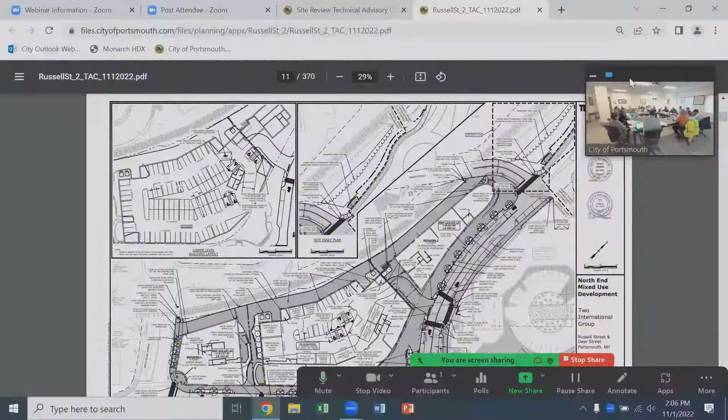First comment is staff is to review third-party stormwater and traffic reviews when available. We did get the TEC review letter last night and the CMA review letter earlier today. I do want to go through those a little bit, but I'll go through the staff comments first and then get back to those peer review responses.

Comment 2: speed bump should be a hump, please include detail. We can make that revision. Eric, I'm guessing this was yours. Do you have any specific dimensions of height, length you're looking for? No, but I think if you have access to ITE, they have design standards for that. Okay, yeah, just follow that. Got it.

Comment 3: TAC will need to review the redesign of the building relative to sewer easement prior to recommendation to planning board. That was the handout I passed out as Peter was reading the project in. The image on the left is the building footprint that has been on the plans for the last 3 or 4 meetings. The building on the right is the revision we're proposing to make, so we'd be increasing the radius of that upper left corner to the gray hatched area in order to pull the building out of the city's sewer easement.

So I know you're all just seeing this for the first time, this little corner here. Correct. Okay, so I don't know if there's any initial thoughts on that, or if you need more time to marinate, but that's what we're proposing to do, to pull that building out of the city's easement.

So is it just the first floor there that's changed, or is it? So it'd be, that portion of the building is 3 stories, so it'd be all 3 stories.

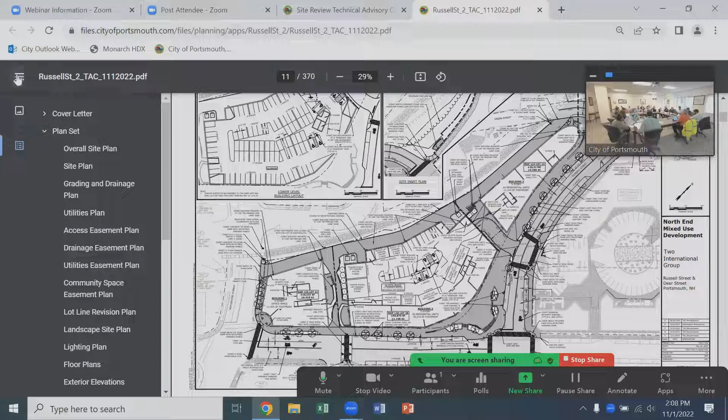You said there's an easement there? It's the city's sewer easement. Is the sewer under the building or close to it? And the easement, is it really wide? I think it's 10 feet or 15 feet off the center line of the sewer, I don't know the exact dimension. That upper left corner of the lot is pretty much all in the sewer easement.

Comment 4: the farthest east parking space on Deer Street next to the fire hydrant should be eliminated. That's fine, we can eliminate that space.

Comment 5 is related to that sewer easement: the sewer main located next to the foundation of proposed building 1 will need to be moved by the developer. So, as I just mentioned, we are proposing to move the building out of that easement. I don't know if the intention of the city is that the sewer needs to get moved regardless of the location of the building.

See Dave nodding yes. That is the direction we have been given. What's the direction? That the city still wants that sewer moved, even though we are proposing to pull the building out of the sewer easement.

So if you're moving it within the easement area, or what's the city asking you to do? To move it into Maplewood, off the property. So then you wouldn't need to clip the building? They want to go from there to there, under the railroad, and abandon this piece. Yeah.

So if you did that, you wouldn't need to clip the building? Correct, just trying to keep up. The intention of clipping the building was to avoid having to move the sewer, but it sounds like the city is telling us that we need to move the sewer regardless of what we do with the building.

Comment 6: Trees and Greenery Committee will need to approve tree grates, planting details, and planting species. We acknowledge that. Parking and Traffic Safety Committee, then City Council, will need to approve on-street parking changes. We acknowledge that as well.

Confirm overlay of Deer and Russell Streets as part of work. I'm assuming this is referring to repaving, Dave? Yes? Okay, so we have shown that on these plans and are planning on doing that as part of this. Okay, we agree with that.

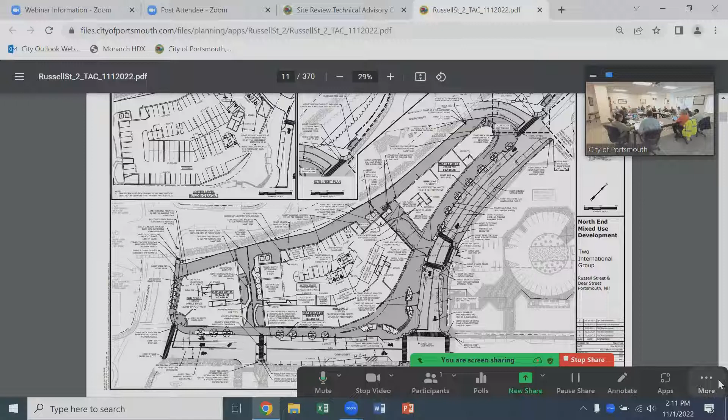Comment 9: upon further review and consideration, a raised crosswalk is not the preferred solution for Deer Street at Portwalk Place, as it is an arterial roadway with considerable truck traffic and a high number of left turns onto Portwalk Place. A high visibility at-grade crosswalk with RRFBs is the preferred alternate. So we're fine making that revision. I just wanted to clarify anything specific we need to do for the high visibility piece of that statement. That's the piano-style keys, the crosswalk markings, referred to as high visibility. Oh okay, yeah, gotcha. Okay, we are fine making that revision.

At all crosswalks, streetlights on either side of the crosswalk must be 10 feet from the nearest edge of the crosswalk with the luminaire centered over the travel lane of the street. The RRFB push button must be no more than 5 feet from the edge of the crosswalk and no more than 10 inches from the level landing. These are state DOT standards. We're fine making those revisions.

I think we're going to need to shift a couple of them to meet that, but we're fine making those, and we'll make sure we get all those final locations coordinated with DPW. Sharrow marking should be provided every 100 feet. We're fine with that, we can make that revision.

Per MUTCD, a one-way sign is required with the do not enter sign at the rear shared roadway at its intersection with Green Street. We will add that to the plan. And the left through pavement arrow on Deer Street at Russell Street is not needed, and we can remove that from the plans as well.

So I'm going to go into the peer review comments that we received yesterday and today, just kind of go through those as well. There's a few remaining on the TEC for traffic.

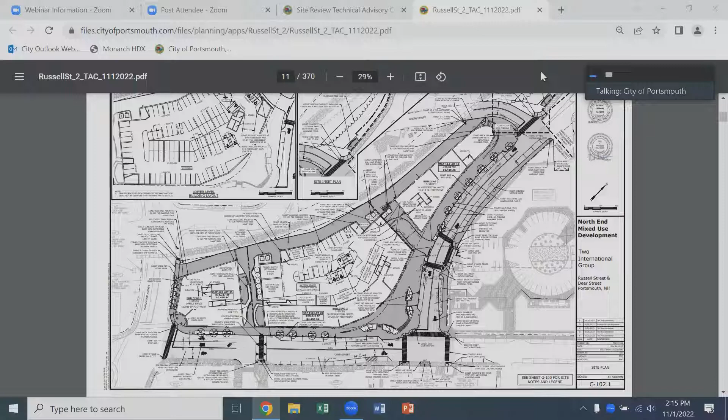For the stormwater review, which we received earlier today, there's one outstanding issue, and they've just asked us to provide some supporting documentation on the elevation of the on-site ledge. We do have boring data and a ledge profile plan that we can provide to CMA to show those elevations.

Additionally, given the size of the buildings on the site and the area we have remaining, we are not in favor of infiltrating that close to a foundation, ledge depth aside. So we'll provide all the backup information we have to CMA, and hopefully be able to close out this one final comment from them.

So that was all I had. If we have anything additional.

Neil, can we go back to the sewer? Is there a reason, if we pull that out of the easement, is there something about our project that's requiring that to be brought into Maplewood? Are we increasing the size of that line or anything?

The main impetus of the comment is that this sewer line is very, very important to the city. It drains multiple neighborhoods. The issue is that if we needed to work on that or something happened to that line, we would be completely blocking your driveway for extended periods of time, possibly. We really don't want that to be a situation we have to deal with. That's the issue.

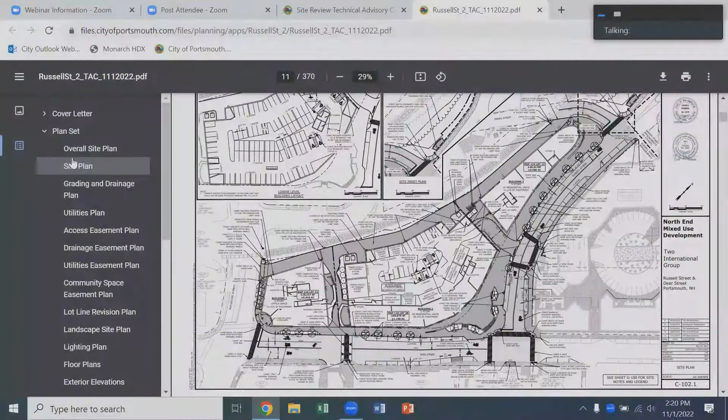Yeah, we can just add - it's hard to see what's going on because I can't see where that sewer is on this plan. We can just add a construction access easement to one of our easement plans for the entire parcel. Because there's already going to be a community space easement there, we can just add a temporary construction access easement on top of that.

Eric, we're not asking for video detection on this because they have a note on the plan saying they will do it. And how much - is it on that G100 too? No, it's a note on the site plan, general note 15 on G100. General note: Contractor shall install intersection video detection for Maplewood Avenue and Deer Street intersection. Coordinate with the City of Portsmouth Traffic Department.

Any other comments before we open up for public comment? All right, seeing none. Anyone from the public here like to speak to this? No one on Zoom. So we'll close the public comment portion and open up for further discussion.

Drainage been reviewed? Yes. Is there anything else outstanding we're waiting on? So there's several revisions, it seems like, that are in order. I think we could go through those and see how you feel once we get through that list.

The sewer main needs to be located next to the foundation of Building 1. That is a revision, and there might be an additional building footprint revision associated with that, or is that not certain yet? If we have to move the sewer, we'd leave the building as it is. Okay, so there's a revision there, for sure, for the sewer.

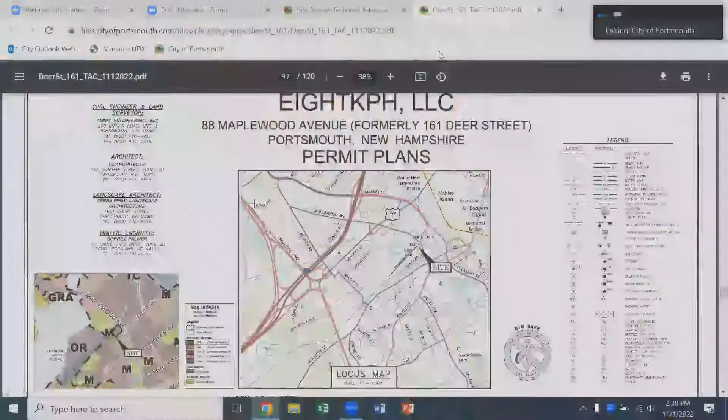Comment 2: please add more trees to the northern corner of the property where the driveway previously was. Also in the submission on page 4 is a landscape plan markup. The number of street trees proposed is in keeping with the ordinance requirements. When you get to that northeast corner of the property, it's an area with a significant amount of electrical infrastructure on the applicant's property. He's expanding an easement and providing more space for electrical equipment on his own property, so we need to work with Eversource to make sure they're comfortable with access to that equipment. We understand that's not the most beautiful thing that presents itself to the street.

However, Mr. Parker has shown a metal screen fence that will shield those transformers with a historical theme he wants to put on there. So we've shown on this additional landscape exhibit an additional street tree. Possibly we'll work with Eversource and try to locate that in an appropriate point in that vicinity, if that's okay to Technical Advisory Committee. There's also a need to get to the grease trap, there's a bike rack, so there'll be a wayfinding sign there too. We're trying to work those things all together.

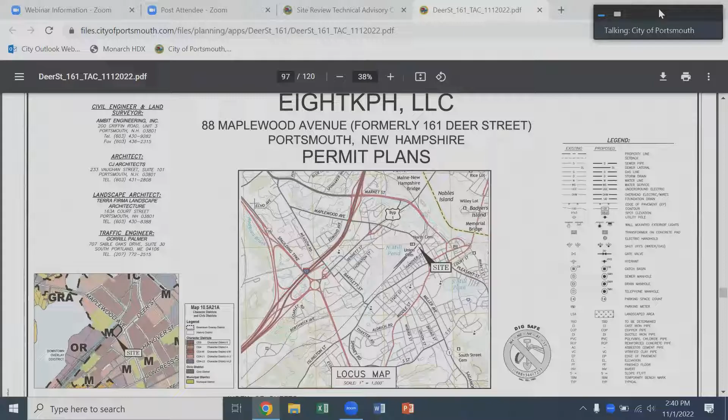The next comment: please provide a letter addressing the requested changes from TAC and any other changes made to the updated plan set in the next submission. Yes, we did submit the TAC response letter of September 6th, and that covered a lot of the issues on the revised plans. But we should have submitted another letter, and I can tell you the major changes not mentioned in the September 6th letter that came from meeting with you two months ago were the driveway location.

The driveway was proposed to exit onto Maplewood. It was not deemed the most appropriate location, so the driveway is moved to access the west side of the building at the existing curb cut off Deer Street. There were questions about the park design, and Mr. Parker did extensive redesigning and upgrading of that design. There were questions about the community space, and we talked about connecting it to Deer Street on the west side, which we did, and updated the community space calculations. There were discussions about that community space dead-ending and not providing ADA access on both ends, so we updated it to provide that, and updated some plan details in accordance with requests from DPW.

The next comment is that the existing water and sewer needs to be terminated at the main - this should be shown on the demo plan. As Mr. Desfosses instructed, I reached out to Mark Batchelder, the consultant on the Deer Street reconstruction project, and he explained that the existing water services to 161 Deer Street were set up on a 4-inch pipe that terminated in a gate valve outside of the right-of-way. The intent is that those existing services can be removed up to that gate valve, which is not in the right-of-way, so there'll be no cutting of Deer Street, and the plans have been revised to note that.

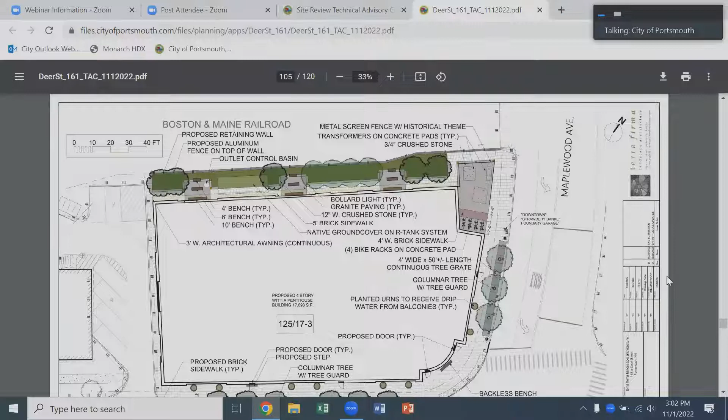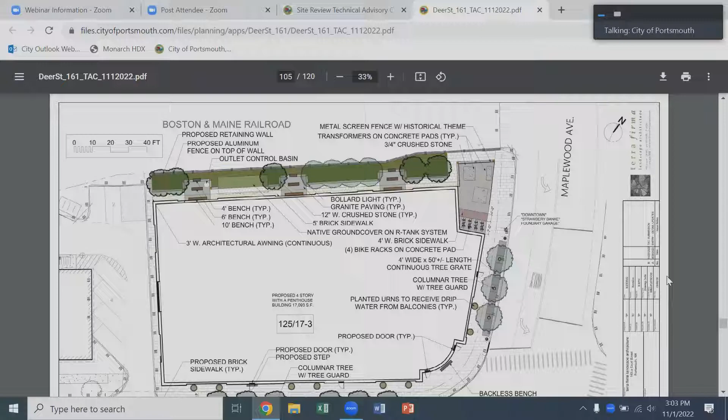At least you're being consistent. Yeah, exactly. Anyway, check out the park.

So if we did what you say, we'd lose green space. Well, you might lose a little. Maybe, and I'm not even sure. Angle that corner? Just kind of bring it in. All right, we could do that. You know, doing this, check out that park, it's a work - that's why it's a little more inviting.

Hopefully you didn't come here thinking this was perfect, so we're just giving you ideas. No, and I know you put a lot of time into it, Terrence, and I think you do great work. So just round them off, the corner there. They might even be bad ideas, but at least they're ideas. Exactly, we're trying. Rounding a corner is always a good idea.

Yeah, that's a good answer. Also round the corner on the fence. On the fence? Yeah, on the fence, make it more - just small fillets, like even a 3-foot radius. Yeah, fine, yeah, we could do that. We could do all of those rounded edges.

No, you mean on the edge of the walk, the brick back here? It's the edge of the walkway to facilitate drainage, so when plants grow up, they don't block the water from flowing off the sidewalk. So it's flush, but you're saying it's gravel - it's a crushed stone edge. Okay, so it facilitates drainage, so the plants don't block drainage coming off the walkway because it pitches away from the building.

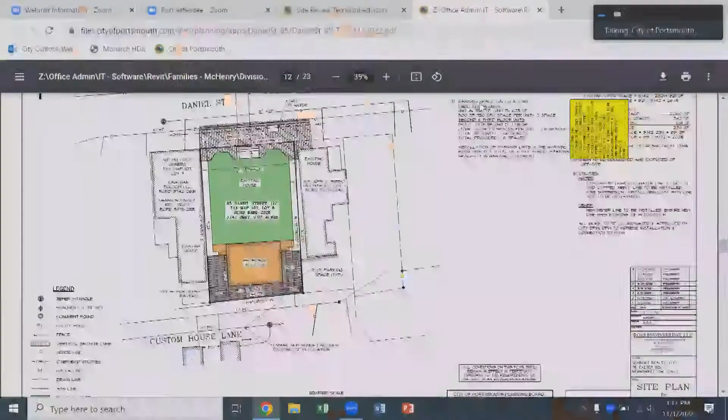I think the significant issues or changes from last time we were here would be found on the site plans. What we've proposed to do is install parking lifts in the covered garage, so we now have, as proposed, a total of 6 off-street parking spaces. The other significant item is that we've worked with the basement egress stairway and believe it's now compliant and shouldn't cause a life safety change. Other than that, the changes that were requested were relatively minor, and I think we addressed them in the submission. I believe yesterday we received some feedback, and what we're circulating now is some detail on the proposed lift system that we would like to install.

So other than that, I'd turn it over to Mark to go over some of the technical details. As Chris was just mentioning, this is really a basis of design and conceptual, just to show you that the lift does work in the space provided. We have a fairly high floor-to-floor, grade to second floor here, about 11.5 feet clear, in order to provide space for stacked cars. As we've shown in the other floor plans and site plan, the intent is that there are 2 garages, each would have a lift in it, and those 2 parking spots would be associated with the 2-story units, the larger 2-bedroom units on the second and third floors. The cut sheets on the second and third pages show you more specifics of the lift and the spaces required. We've highlighted on the third page the overall width and length of what's required for the lift and what we have available, currently shown in the garage plans, and what we have available exceeds what's needed by this particular manufacturer.

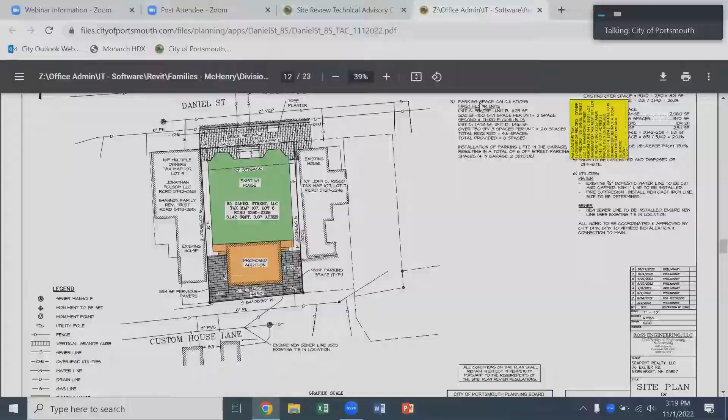All right, thanks. Any questions from TAC members? Why does the garage step down at the end of the ceiling? It really just allows space for drainage for the deck above. So if it actually steps down or not, you might not need to do it.

Is there a sensor on the ceiling to prevent a taller vehicle from going in? I haven't looked that far into the controls of the system, but there's got to be something, since people aren't always driving a Mini.

It's hydraulic, right? Correct.

How do people get into the garage? Is it through the garage door, or the side door, or internal? It's either through the garage door or through the man door from the center hallway of the building, shown on A1.

There's a door leading into each garage bay on the center corridor. Yeah, okay.

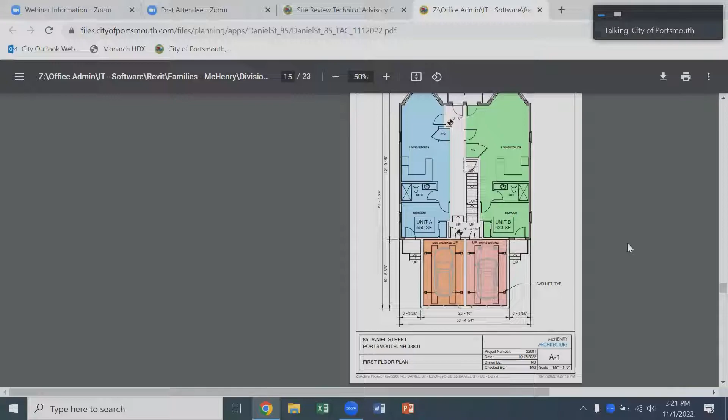20 inches on either side of this lift machine? Off the top of my head, I mean the way these are, yeah there's at least 2 feet, but there's 4 posts that control or hold the lift, and space on either side of the ramp that actually holds the tires in the vehicle.

How are you opening the door to your car? Well, that's the lift itself. But you only have 20 inches off the door to the house.

Right, so it looks like if you get 141-inch width of the garage and the unit is 100 inches wide from base to base, you've got 20 inches to either side to get out of your vehicle and then walk into the door going to the house.

They gotta go over that, go around the stanchion and over the arm to get in the house, if the lift is down. Yeah, it'd be 20 inches between the hydraulic post and the wall. Exactly right, so it's just that one pinch point, on all 4 posts. That's it.

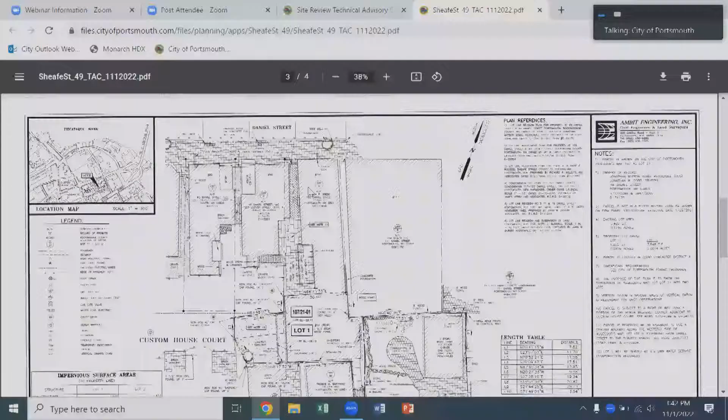Please identify the mechanism for creating easements for lots under common ownership. Included in the submission are the proposed conveyance deeds — they include 'together with' and 'subject to' as appropriate for Lot 1 and Lot 2. Lot 1 will be granting a building maintenance, access, and utility easement to Lot 2, and Lot 2 will be granting a building maintenance and no-build easement to Lot 1. Those are shown on the easement plan.

Please clarify which statements in Note 8 go to each easement on the easement plan. That was prior to the one just submitted, so I created Notes 10 and 11, which specifically say, for example, Note 11: building maintenance easement over Assessor's Map 107, Lot 2100, to benefit Assessor's Map 107, Lot 2101. The notation for the note is in the upper right corner under that 77 square foot easement designation, 'See Note 11.' So I've broken those out to be specific.

Applicant must show new water servicing Lot 1 on the plan for the city to approve the location; existing line servicing Lot 1 to be abandoned. So we submit the water service plan tying into the main in Sheafe Street, running up that narrow corridor.

We added Note 12 to the subdivision plan, calling for Lot 1 to have a new water service, and we added that the existing Lot 1 water service shall be abandoned. Hopefully that addresses the concerns, and we can move forward to the planning board. Do you want to add anything? We're ready to address your comments. All right, thank you.

I haven't seen it, that's what I'm saying. There's a man door at the end of the easement. Where's the door in the back, Jonathan? Is it at the end of the easement across from the Karen White construction property? Is it operable?

Can you hear me? Yes. The door that is at the end of the easement from Daniel Street, across the Weeds property, is a 36-inch door and is operable. I would like to point out that that area is actually used by Colby's Restaurant for an outdoor eating area and a storage area.

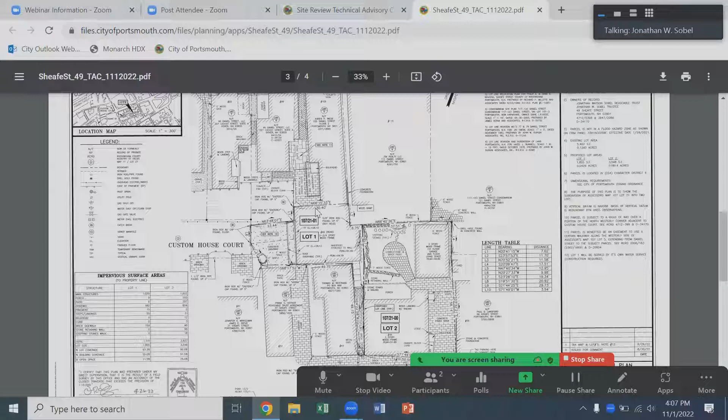In the case that we would continue with the designated Sheafe Street 911 access, we have an easement and dedicated ownership to keep that pathway clear. So I would not foresee turning to Daniel Street as a 911 address, because that really is quite cluttered—historically it's been quite cluttered. But in the case of Sheafe Street, it would be a dedicated fee simple ownership in which that access point would be kept clear at all times.

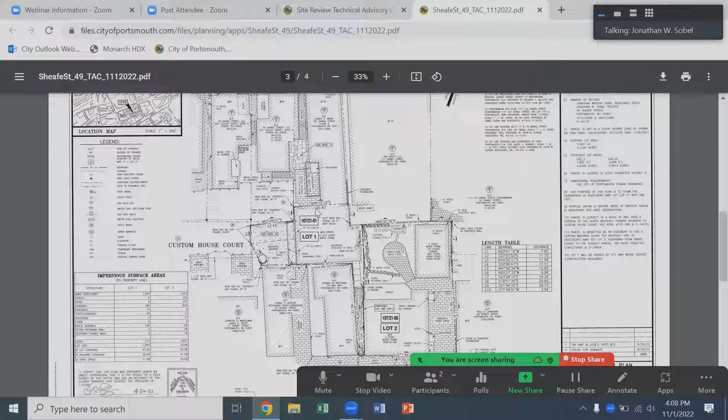So I just want to ask Pat one question. I did see that a lot of them are addressed off Daniel Street—is that something you would prefer, given that? Is that the other option you'd prefer, to be addressed off Daniel Street? No, it would be Custom House or Sheafe, not Daniel Street.

You'd like to see a site visit prior to this? I think a site visit would be best. It is my opinion that the determination from 10 years ago was the best possible solution for this location and this constellation of buildings, and my personal preference would be to stick with what they decided 10 years ago. Thank you.

So our deputy fire chief has asked for a site visit on this one to get a better understanding of the configuration of this area, and that's probably a good recommendation. Also, I think we need a little time to confer with staff about how we might explain that to the planning board as a condition, because we've typically wanted to see it as a condition of approval for the planning board that they get addresses and map block numbers.

Well, I understand that. I think there's a new consideration now that there's a subdivision, so I think I would need to explain to them, because we have really required addresses be squared away before, or at least before the building permit. So I think it'd be okay—I don't think it's a problem. It gives us a chance to kind of talk about that as staff as well.

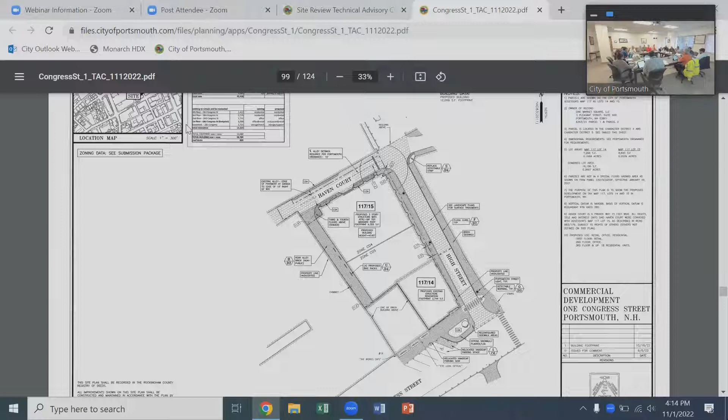The first one is that you would like us to identify all temporary licenses that will be needed for construction in the city right-of-way. Just to briefly answer that, we would expect that this project would require a CMMP plan. Mr. McNabb is prepared to talk about the plans for that, if you so desire to talk about that now - we'll leave that up to you as to whether you want that level of discussion at this point.

Before anybody else jumps in, I'd prefer we have an offline discussion with members of Public Works, talking about off-site improvements - is that what you were just talking about? Well, this is the comment about license agreements in the right-of-way, city right-of-way. The question asks to identify all temporary licenses. So just, you know, a mile high, most of them will be CMMP. The only license agreements we see as part of this regulatory process is the awnings on the building that will go over the sidewalk - that will be a license agreement request.

So, Mark, the fixed awnings, if there are any, would be an easement, not a license. We did that on Maplewood. Okay, whatever the current term is with the city - easements or licenses - so it would be for awnings. We're showing fixed awnings over the city sidewalk. If we do catenary lights over the street, building to building, there'd be some form of easement or license for the catenary lights. Other than that, the street improvements - we don't see any licenses for any of that. The city's either going to approve it or not, and that's part of the process.

In terms of CMMP, for life safety, we don't want to fool around in this street - we're proposing to do quite a bit of work. We would propose to close High Street to do our underground utilities, our regrading, rip everything up, put our foundation, put our steel up, and keep it closed for 3 or 4 months for that duration, with flaggers running traffic both ways down Ladd. We would not try to keep open half of High Street - that's CMMP. I'm just using this as an example because the question was asked. It's important to keep pedestrians and cars moving, but it's also important for construction to push back if it's not safe - you can't build a building off a 4-foot sidewalk. So, unless anyone has other questions on the licenses and easements, that's just a mile-high view of it.